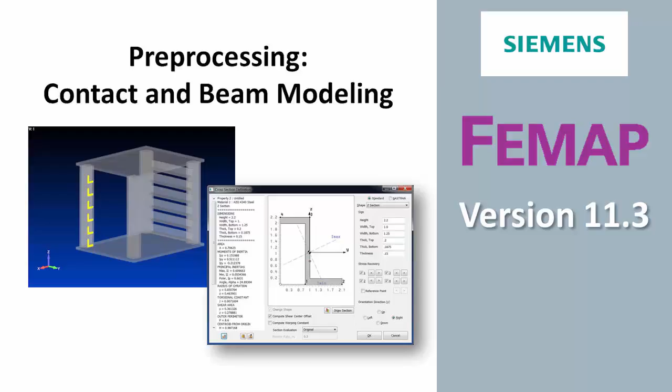Welcome to the FEMAP version 11.3 What's New video series.

Anybody that works with lots of connections: we wrote a connection data surface that we had in 11.2, and it works great. That's still there if anyone's using it, but what we did was come up with a new tool. We just call it the Connection Manager, and instead of doing it region versus region, we now put just your connections in order. The regions are there, the slave and the master, but also all their information.

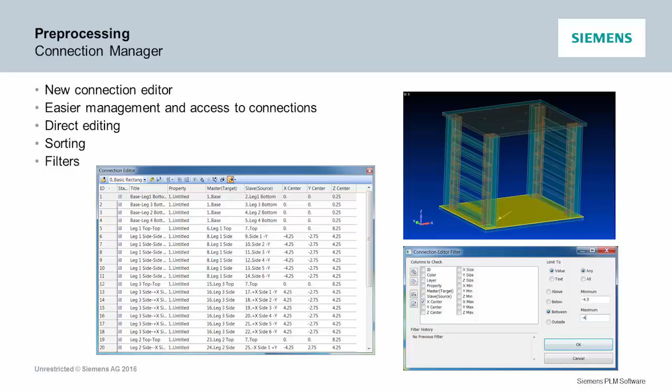So you can now sort by property, you can sort by location in the model, you can filter by these items. So now if you've got a bunch of contact regions and you want to adjust all the ones that are at a certain water line in your model, you can now sort by that water line, get just those contact regions, and edit them all at once. It's a real nice tool for editing your connections and contact.

Element face picking. In FEMAP, when you're picking faces for putting on pressure loads or creating contact regions or anything, you need to pick faces. We would ask you first which elements you want to consider for face picking, and then have you pick the faces. We rewrote this just to streamline it so that if you've got something on screen, it just assumes those are the elements you want to pick faces from and not anything else that's not shown.

And then you just pick one face and it grabs the connected ones and you're ready to go. So it has greatly streamlined the number of clicks for putting any type of pressure load on the inside of a body or something, or creating connection regions.

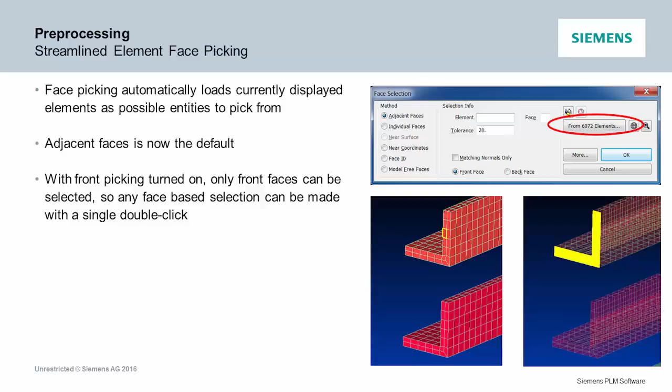The thing I like to show with this is just a new empty model. I'm going to bring in an existing Nastran file. And this is just a mesh. There's no geometry, there's nothing. It's just a hex mesh, a bunch of little pieces that form probably a coffee table or something.

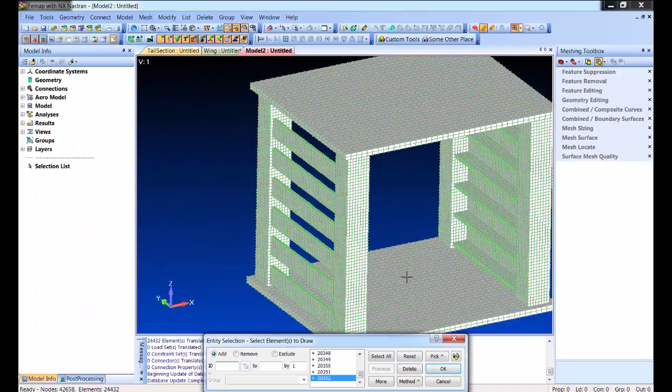But together with the draw/erase, I'm going to go into draw mode right now and pick by element, and I'm going to set this to pick front. So I can quickly now go in here and pick one element in each leg and just go down these 4 legs. And I've picked one element, and our selector also has an add all connected elements, so it's going to automatically go out and grab everything in those legs. And now I say OK, and that's what I'm drawing.

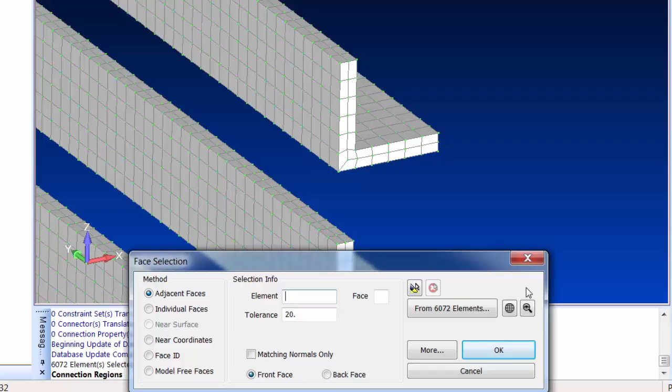So now to create connection regions, I'm just going to create a new region. Instead of asking me which elements I want to consider for face picking, it's now just assuming I want to use the ones that are currently being drawn and asking me to just go ahead and pick a face. So now I just go pick a face and I'm done. I've made that connection region.

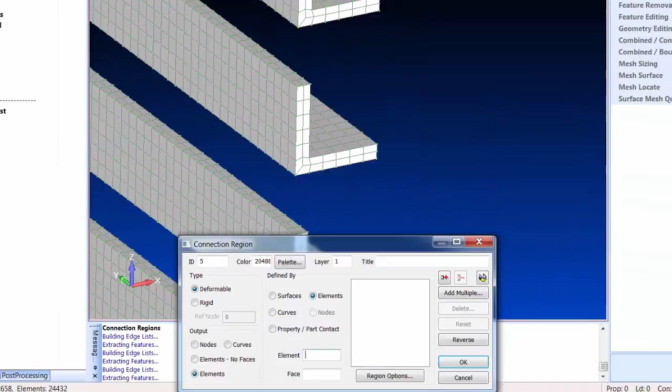You can just pan down to the next one, create a connection region. Pan down to the next one, create another connection region. Oh, did that wrong, multiple. And then the neat thing with this draw/erase, I can do the flip. And now I could go create the other side of the connection region just by picking a face on that side. And now I got that.

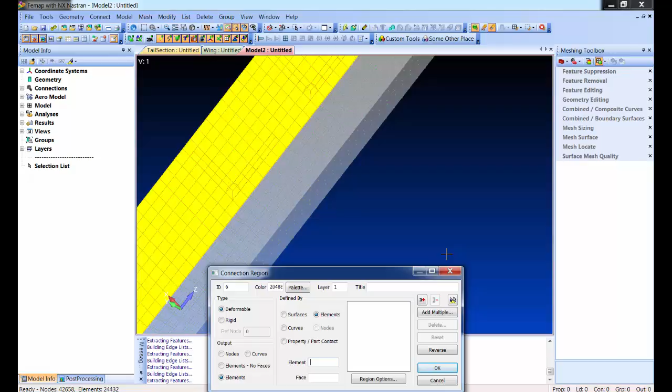So you can pretty quickly now go create both sides of your connection regions from a mesh, have those things ready to go, and get your model all connected up. And this also works anytime you're picking faces. So later on in another model, I'll show you how if you want to pick some big flat area and smooth the elements or do something, this face picking now, you just pick one, it goes and gets the rest.

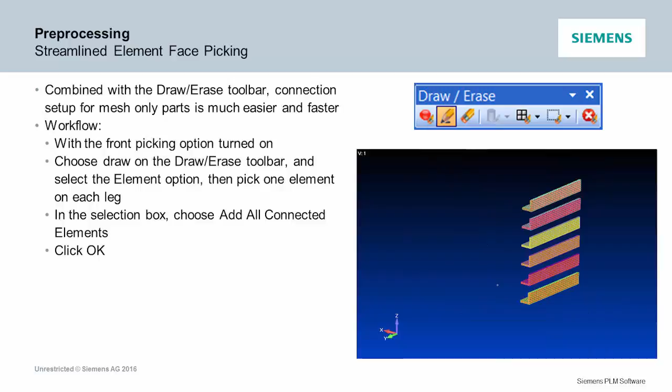Most of us have to create mid-surface models with beam stiffeners, so we use a lot of beams. And what we did here was try to make your beam modeling and also the documentation of your beam properties a lot nicer. In FEMAP in the past, we always had our own standard sections. We had the standard Nastran sections, the PBEAML, PBARL, and we would put up the words for what you were going to type in, but we never showed you what they really meant.

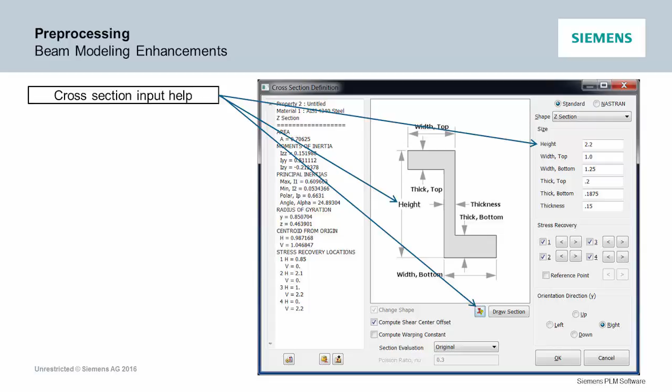So you'd enter like height, width, you kind of guess which one we're talking about and see how the thing changed. We now throw up here a nice picture that shows you what we mean by height and width and which is top and bottom and all that. So now it's a lot easier to type those in. And then once you type those in, we've added this window here that immediately does the basic calculations. So you see your areas, your inertias, you see the principal axes, you see the centroid.

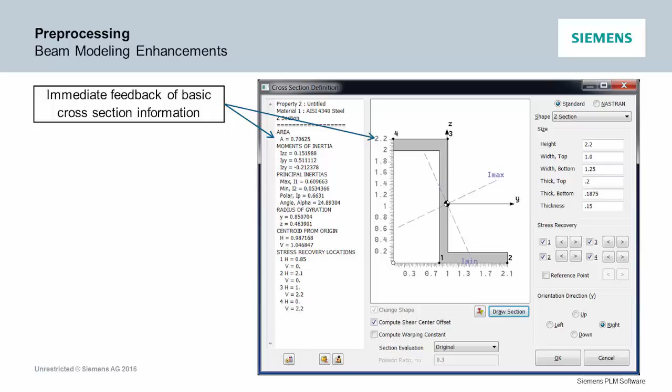And then the next calculation is a little bit more intense, so we don't do it automatically. But if you press this little button in the bottom left corner, that runs the little miniature finite element solve we do to calculate the shear center and the torsional properties.

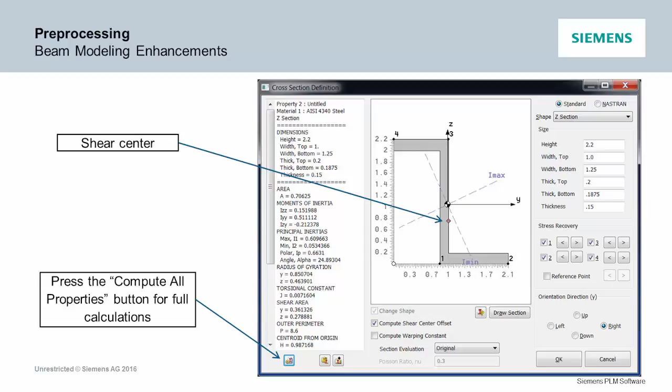So then once you press that button, it will display the shear center, it will add the torsion properties, and the cross-section is pretty much complete. And then since all of us are creating these models that we have to document, there's a nice button you press, copies that entire thing to the clipboard. You go over to Word or wherever your document is and drop it in.

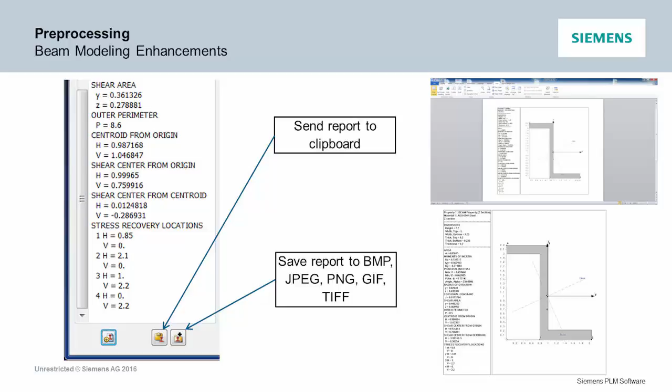You get a real nice report of your beam section together with all its properties. And then you can also save it to a file too if you want to just save it out that way. Arbitrary cross section. So that does all the properties and any section, and you can pick like a Parasolid surface. You can draw your own surface in FEMAP and get all these same things.

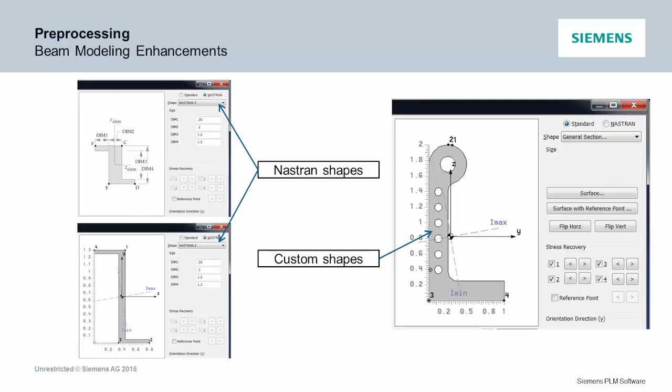And here's the Nastran standard sections. At least the FEMAP ones were called height and width. You did have some idea what you were typing in. Nastran just has dimension 1, dimension 2, dimension 3, dimension 4. But now you can see them. This has been a customer request numerous times over the years.

We've always had front picking, but front picking was really like a single thing at a time. And front picking is kind of difficult because if you have a million elements in your database, you got to burn through a million elements or come up with some algorithm to do it. Our graphics guy came up with this real neat thing where he keeps off-screen bitmaps with the ID information burned in every pixel, so that then when you're front picking, all it needs to know is what pixel you're on top of, and it already knows the ID of what's in front because it keeps track of the last thing drawn.

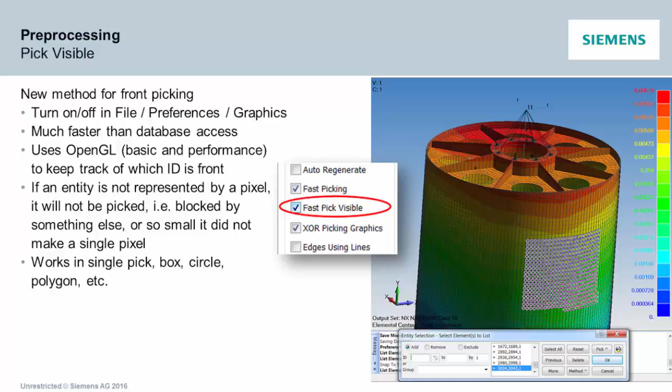The caveat here, though, we actually debated calling it pixel picking. The thing to remember is that if your element or curve or surface didn't get even a single pixel on screen, so you're zoomed way out on a million element model and there's only 9 pixels, there's only 9 things that are going to get picked. But once you're zoomed in enough that you can see the things, they're going to get picked. And it is really, really fast.

So right now, again, you can turn that on and off if you just want to pick the old way, in which a box pick always goes all the way through the model. But if you've got front on, and I'll just do like list, model, element, now it's just as fast, almost no matter how big the model gets, because it's just looking at pixels. The old one would take a long time. The new one now is fast.

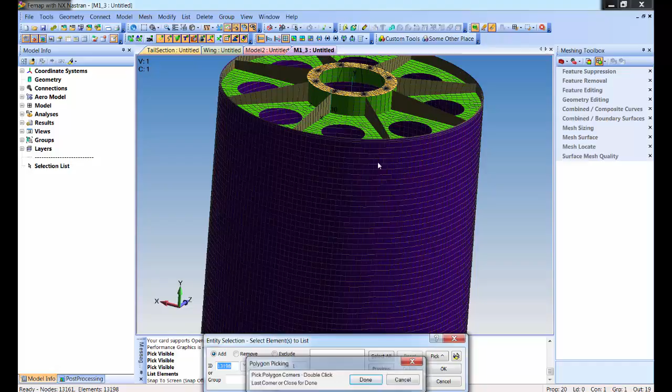And now you could also polygon pick and only get the things that were in front, so it doesn't pick anything behind. So it's going to be really handy for, again, pressure loads; anything that you're picking on the outside is something that's going to be pretty handy. And the speed is what's really neat.

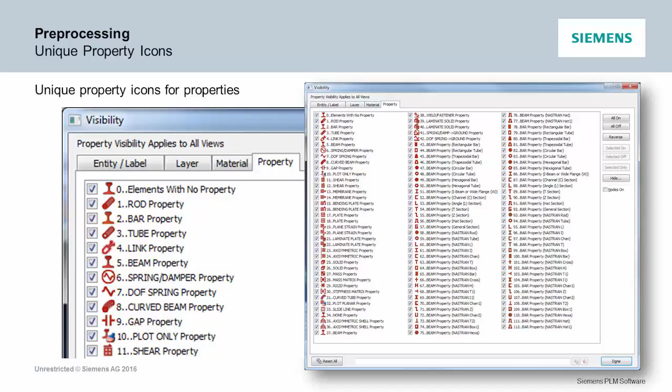Small customer requests. The little icon you get for a property in FEMAP always showed an I-beam as if everybody's model was made out of a million I-beams. We now actually show you if it's a plate or a shear, you get a different little symbol. And if you're using some of the Nastran standard sections, you get the symbol that matches the standard section. It's not a big thing, but at least it helps you look at something and know that it's a plate.

If you're meshing plates, we used to list every property. You could go pick a beam property and it would say, no, you can't mesh with that. We only show you the ones that you can mesh with now. So if you're creating beam elements, it only shows you the line properties. If you're meshing with plates, it only shows you the shell properties. If you're meshing with solids, it only shows you the solid properties.

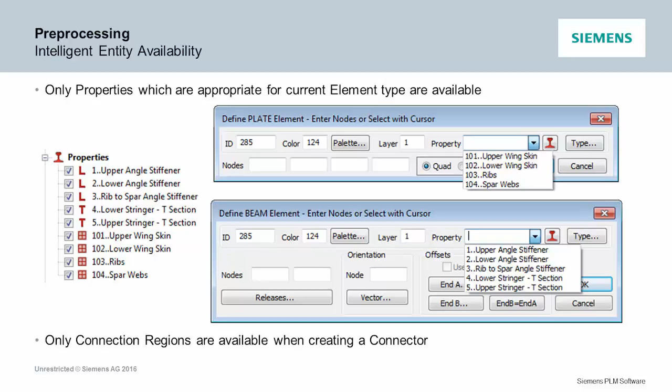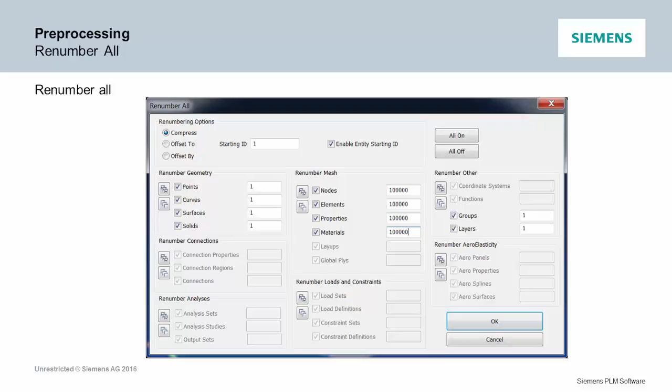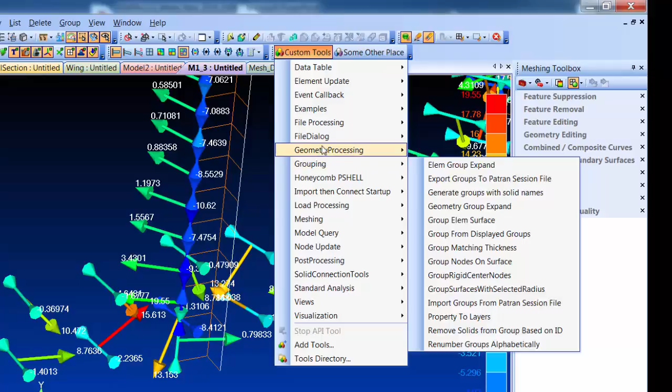We have these custom tools, and this is simply in the FEMAP directory. There's a folder called API, and inside API there are little BASIC files or executable files, most of them that we've written or customers have sent us. These are customizations on top of FEMAP that are available, and they get installed with FEMAP. If you add one, it immediately becomes available in this menu, and there's a bunch of handy things in here.

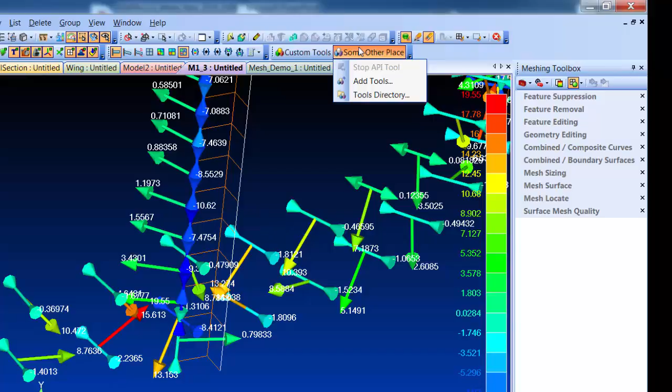But we found in a corporate environment, a lot of people want to have their own, so we added a second button, and I called it some other place. You can now point this to another network directory, so if someone else in the company writes a nice little API that shows the max strain on all composite elements in your model, they can just drop it on that network location. Everybody that's using FEMAP will see it and start using it. So you can have your own local ones that you keep yourself, and then you can have a whole other batch of company-approved ones.